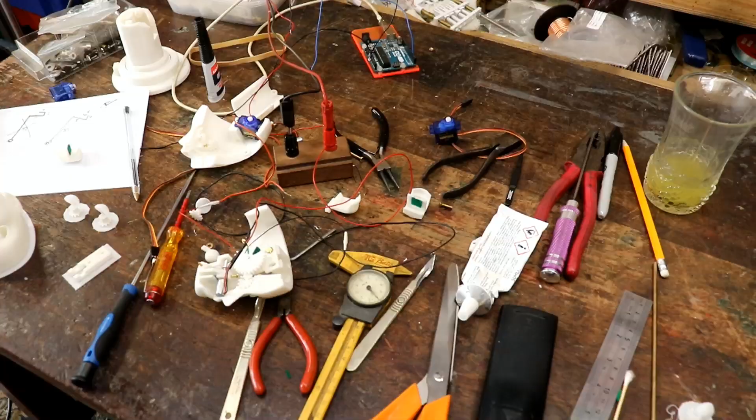Welcome back, dear friends, to a very exciting episode because the head, for the first time, the whole head shell has finally finished printing. Clear the decks, you say? Oh, I don't know about that.

Here she is. So 15.5 hours that took to finally print, but it did it, and that's very exciting because I've also managed to print eyelids.

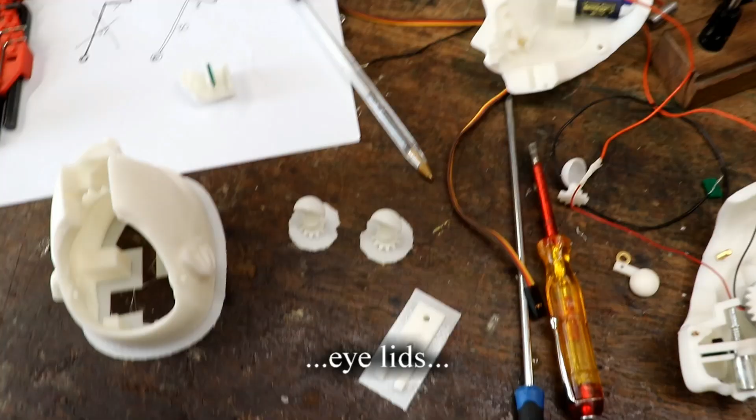I started off thinking, I know, I'll be clever, let's print two eyes at the same time. Perhaps I put them too close, but you can see as they're stringing across, they're so fine. I had a little bit of spaghetti there, so that was out. So I've printed both of them individually, plus a new combined piece to hold the eyes in place.

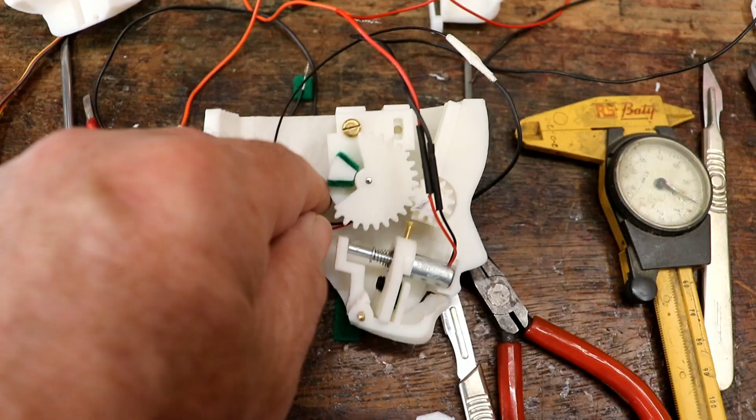I've got the mouth parts left over, the ones I developed, ready to go from that one, as is the eye motor. So it's time to put everything together.

Thing is though, I haven't been working for about 25 hours or something, because I just haven't stopped printing with it. It's stopped printing now - we can't have that. But what can we print now? Well, we've got all these bits printed.

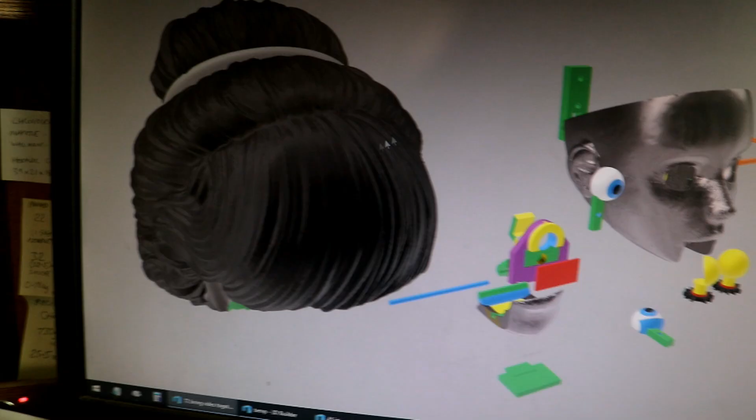But the hair - so what I've done is save that as an STL and then put it into the Creality slicing software, to discover to my horror...

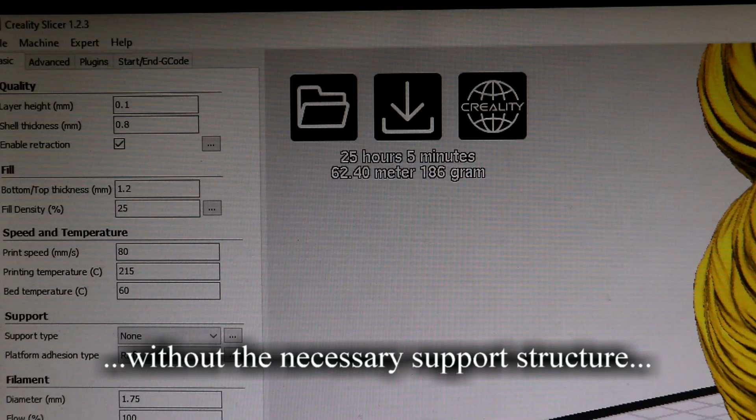Oh, hurdy, hurdy, hur. 25 hours, 5 minutes, 62 metres. That's nuts, that can't be right. I mean, it said it was going to take 12 hours for the head, and it took 15.5.

Thing is, if I start this printing, and then find I need to make changes while I'm putting the head together, I can't do anything about it. I think I'm going to have to wait. I haven't got around to buying another one yet.

But that's nuts, heavens to Betsy. 31 hours, or more like 38 hours at this rate. That's nuts. Oh well, I've put that out of my mind entirely.

Let's see if... I'm hoping this next part of the assembly is going to be most rewarding and enjoyable. Although, having said that, I do wonder, because the fiddliness of the eye...

Oh, I've just realised two things I haven't printed yet - eyeballs. Right, well that's good. I'll get that switched back on again and warmed up, and we'll get them printed.

Well, I've cleaned it all up, all little bits and pieces with some nice new sharp scalpel blades, and inevitably cut my finger. Never mind. This is going well - what I've discovered is I'm relearning stuff.

Let me zoom in a little bit. Because the eyes - I suppose I could change the shape of the back of the eyeball, because they're sort of sockets and come round quite a lot.

You can't glue these together and fit them in together. You have to sort of pop them in, but once they are popped in, because the gear teeth will line up, I'm wondering whether that's just as good to do it like that. Because there's one gear that's going to be turning both of them. Who knew? So that's exciting.

Heavens to Betsy. This is why these videos are taking more and more time to produce, because I'm having to work at the minutiae, I think.

That's right, adding the eyelid to the eyeball. And then I was working on the fact that I didn't want a big gap round here, because if the eyelid was a millimetre larger diameter and this was a millimetre smaller, you would get a gap, which the whole point was to avoid.

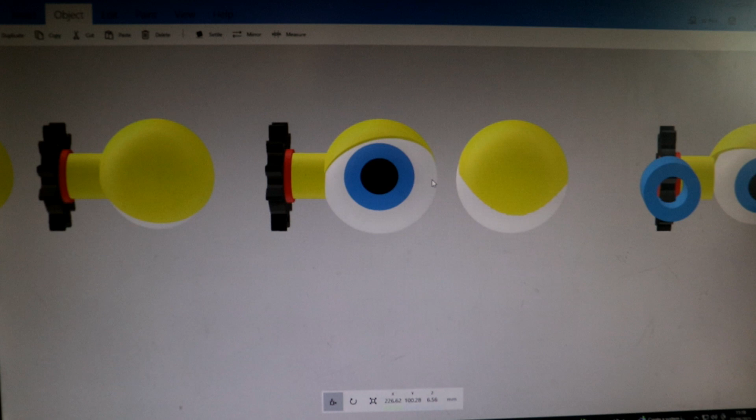So I worked out how I could squash the actual eyeball a bit, keep it the same width and same depth, but squash it down a bit. That way, dear friends, rather cunning plan even though I say so myself, you get an eyelid like that, but the back of it is still completely the larger diameter.

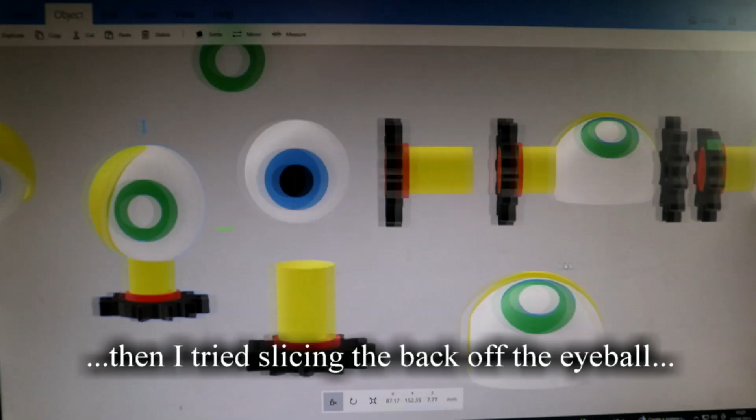Let's try it at 0.06. Same problem exactly. Because I sliced the back of it off, and it printed beautifully at 0.1, sort of standard or whatever. So that's nice, but obviously it couldn't print that at the same time.

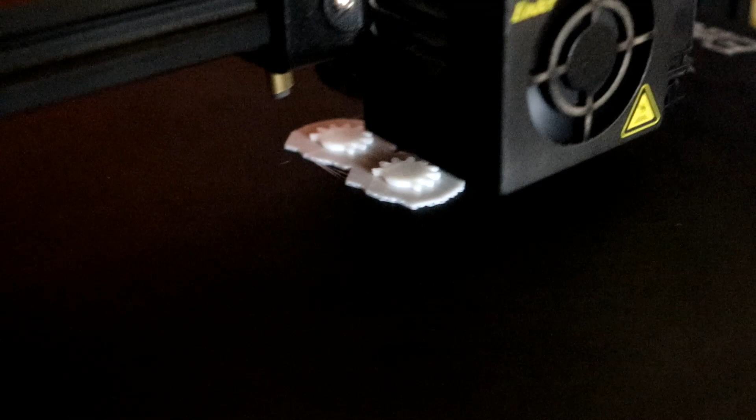So what I had to do was to separate the two, like this. And I made a key shape on it, so that's got a little block on the side, so it slots in. And here indeed I am printing two more eyes and two more gears, just to check that everything will actually fit together.

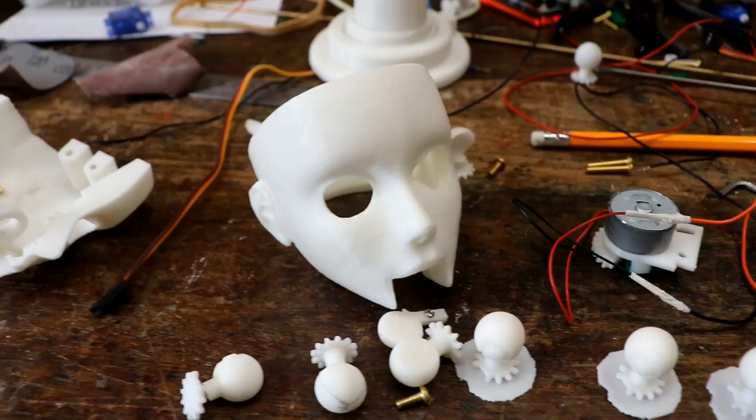Talking of everything not fitting together, while I'm waiting for those eyes to print, I could assemble the mouth, because I printed a new one of these. Well, the other one got stuck, I couldn't actually get it out of that half head. So I printed one and just discovered it doesn't fit. It's too wide, this head is too narrow.

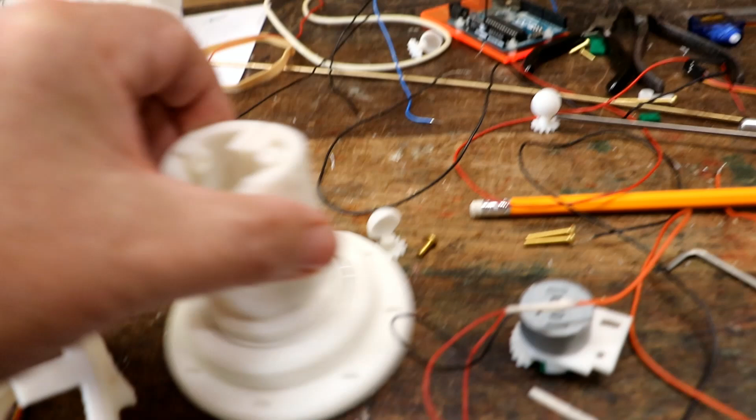And I thought, ooh, I haven't tried that on the neck yet. Try it on the neck and it doesn't fit, it's too narrow. So that's interesting. I know that I must have made a mistake when I was working with half a head. So I've got to do some design changes.

I think it only means I'm going to have to reduce the width of that slightly, and reduce the width of that. That is far more preferable than having to change all this, although I have to at some stage, because I don't need those eyeball supports anymore.

Thing is, of course, I couldn't print this attached to it, so I had to cut it, slice it apart, and then make a little socket in here. Originally it was just a round one, so you had no idea where you should glue the gear in, where it should line up with.

And I thought, no. So I created a key, funny little rectangular bit at the bottom. It slots in beautifully and allows you to line it up perfectly, and also allows you to use these for both eyes and just flip the actual eye bit over.

So that's exciting. And I've tried some other things afterwards, just to overcomplicate matters further, of course, but we're going to stick with that. The eye saga continues. It's unbelievable.

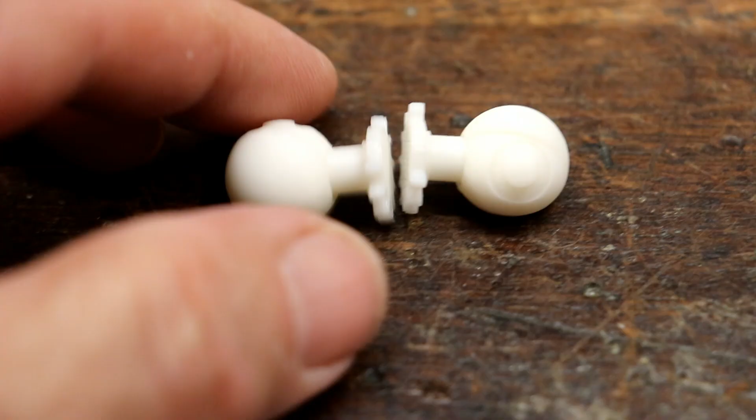I printed them as a final test and forgotten that I'd added, at some stage, made that rim a teensy bit wider by about 0.2 millimetres to try and take up any horizontal slop, and they wouldn't fit. So then I removed that and made it back to where it originally was when it did fit, and then printed another couple and forgot to flip one over. You could not make it up.

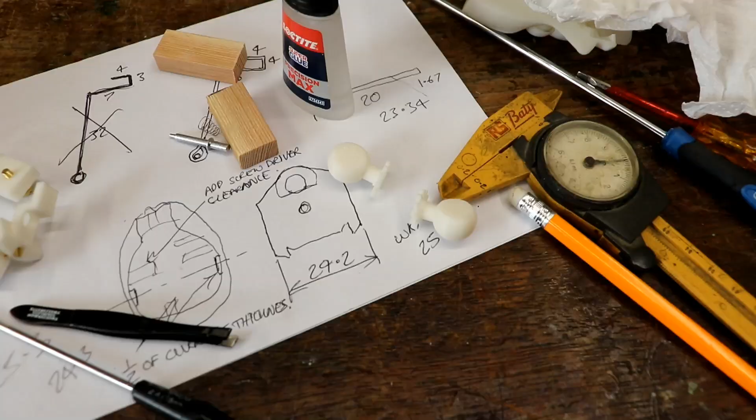Because having got those two eyes printed, I couldn't get them to line up on both sides. Then I noticed that in fact I'd flipped the eyeballs over, but I didn't think I had to with the gears - the teeth are ever so slightly out by a few degrees, so I had to flip that over too. So I'm printing another one.

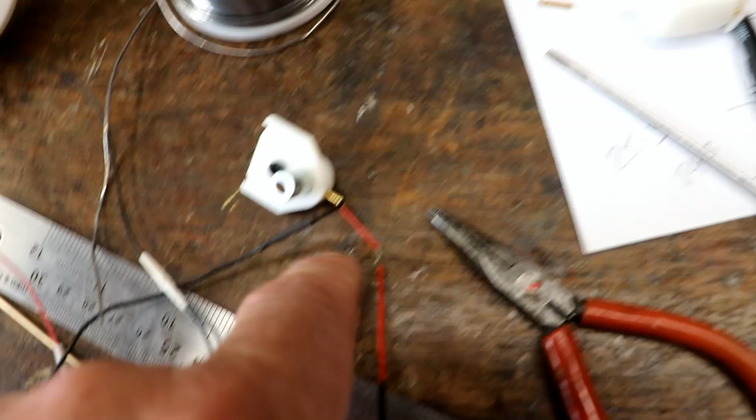And I started cutting those little bits, the pivots for the jaw, got the jaw in and all working, and then noticed the wire had snapped on the mouth solenoid. So I had to take that all apart, get it out again - thank goodness I could get it all out. Then I soldered it and put it all back together.

Oh, it's just never ending, it seems. I just want to get the eyes and the mouth to work.

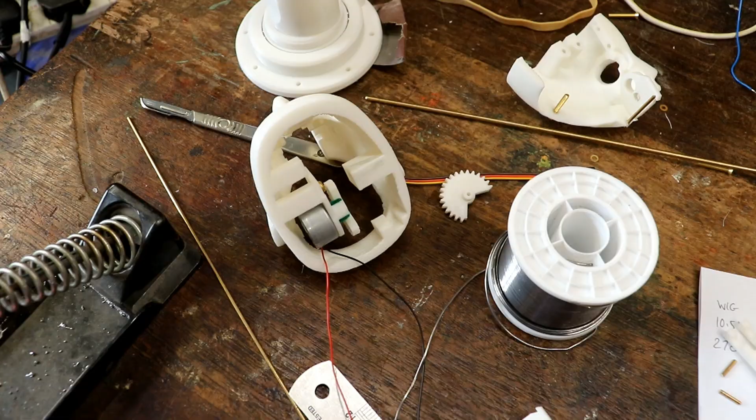Well, that was a little bit more positive, because I remembered to put the spring and the solenoid centre in first - well, almost - before I screwed that on. I also found out how to set this up and align those two little rods. A bit of masking tape over the bottom holds it all on and makes it so much easier.

So that's good. I just need to wait for this wretched eye to finish printing so I can try and realign those ones. Oh, the neck.

I remember thinking it can't be this simple getting a servo motor to move it like that, and it was. I should have known that didn't bode well for the future. Anyway, while I'm waiting for that, I'll go and do the dishwasher.

Eye open. Isn't that lovely? I'm so pleased about that.

I'm really looking forward to writing a little sketch to function to do that. And then the mouth.

And of course I can control the speed and everything with both of those, with the pulse width modulated output to control the power, sort of. That's amazing. And then being able to look right and left - oh, so excellent. It's amazing how lifelike she looks suddenly, with her eyes and everything.

Now I can try and sort out that wire bending bit that links the servo motor in the head with the back of the neck.

So here are the linkages from before, and here are my drawings. Let's see if we can get that set up and get the servo screwed in.

Oh dear friends, another step closer. I'm so pleased to have got that linkage worked out earlier.

That's really handy, and it just fitted in so I can get the dimensions off that, and that's allowing her to look right up and right down the limits of the head without having to stop the servo or anything.

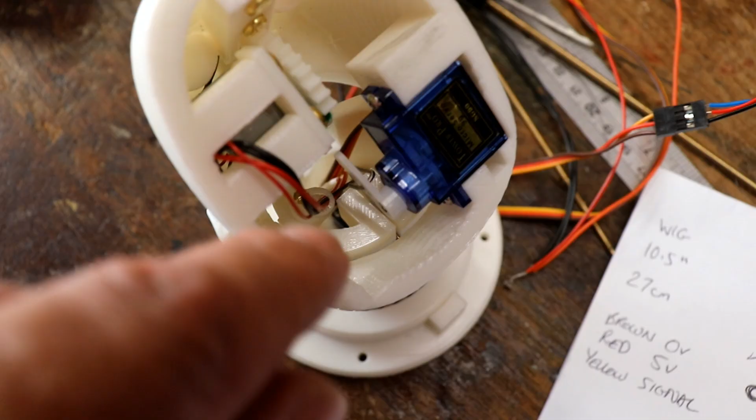I've got the wires fed up and around, because I don't want to get them in the way of any of the internal mechanisms, so I've worked out where I need to add a couple of little bits - little hook things.

Oh, that's great. Right then. So I think I'm going to try and dig around and look for a couple of H-bridges so that I can control the solenoid and the eyes from the output of an Arduino.

And then possibly even get it wired up to an Arduino. I can't wait. What on earth is this new noise in the workshop?

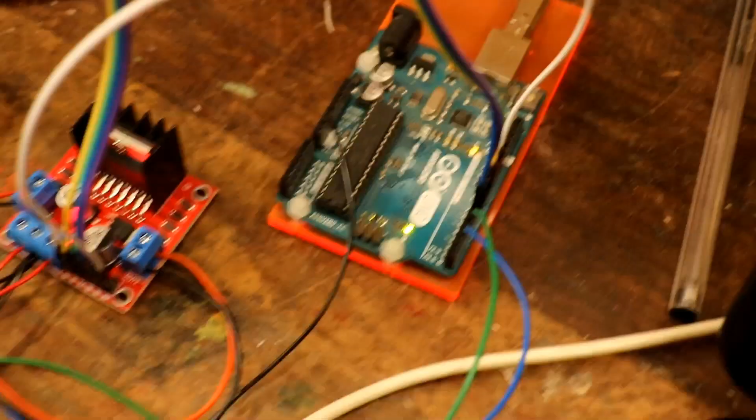Well, I really wanted to finish this video by showing you something working, showing her face moving. So I've been wiring things up, and indeed programming an Arduino sketch, and indeed connecting an Arduino. That is doing my head in at the moment.

So we've got an Arduino wired up. I've written a sketch just to basically test, and also I miss writing sketches. I've really had enough fiddling around with the 3D printer.

So I've written a sketch just to move her head around, open her eyes, so we can see what it looks like. Eventually, next video, I want to replace that with a Teensy and a Teensy audio board, because they're amazing and it'll allow her to speak and control her mouth properly.

So I've got outputs to the two servo motors, pulse width modulated output, so I can move her head up, down, left, right.

They're run off, because obviously they draw far more current than the Arduino can provide, an H-bridge controller. After several hours of mistakes and trying to work out what on earth I was doing, you run it from 12 volts, not 5 volts, and there's a voltage regulator on board which creates the 5 volts logic for the chip, but doesn't run the motors.

The 12 volts runs the motors, but you can take that down with pulse width modulation to sort of 5 volts, by putting in 105 out of 255, I calculated, for a duty cycle. You can also use the 5 volts this has produced, which is what I started with, to run the two servo motors.

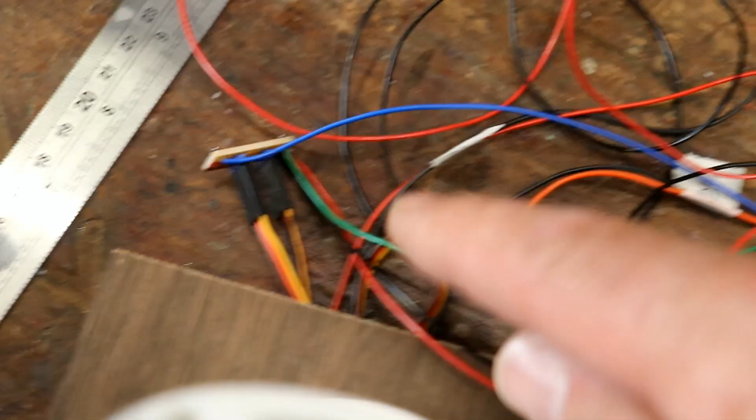Great stuff. The thing is, the noise - for the time being I've written a sketch which just has lots of random things. This is the loop. It's just opening and closing the mouth randomly using milliseconds for timers. I know I'm using them the wrong way, but I'll correct the maths. I can never remember once I've got it working.

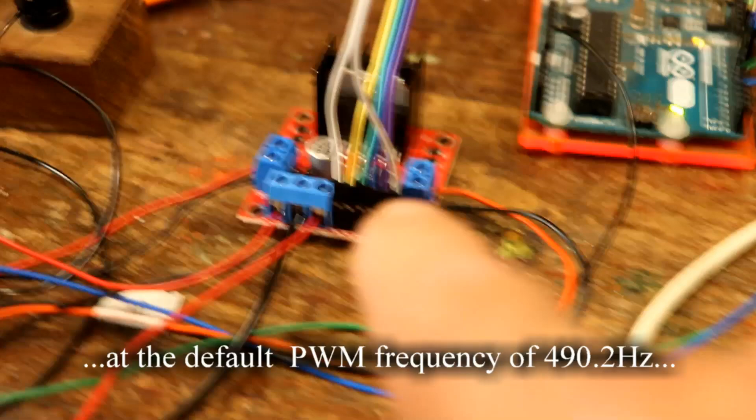As I say, this is temporary because I just want to see it working. So it waits, opens the mouth, waits, closes the mouth, and so on. Thing is, because I've now got this controlled with pulse width modulated output to get the right voltage, the windings on the solenoid are buzzing.

I will illustrate for you. If I plug this back in, this is the 12 volt supply. I'm running the Arduino off the 5 volts from the computer. So the sketch is working.

That is not good. Also, she's blinking, and that's fine because the motor, for some reason, the windings don't vibrate. So the trick is to change the frequency, to raise the frequency of the Arduino's pulse width modulated output with some special code.

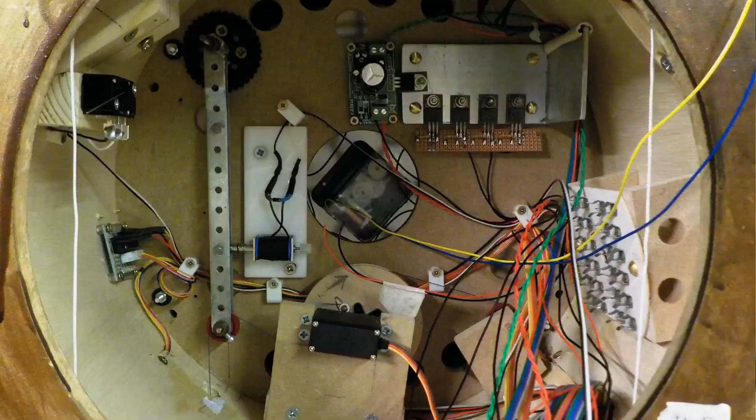I was so thrilled when I discovered how you could do that, because I had exactly the same problem with the barometric prognosticator 1, where I had a little solenoid swinging waves backwards and forwards from side to side, and every time it kicked in, every 5 seconds or so, you'd get this huge buzz. Right, I will go and look that up for you.

Well, for me actually. What a joy. I've just looked up and found the sketch for that, and there we have the line of code that changes it. You type that in setup, and it says set pulse width modulator timer 2, that's pins 10 and 9. Actually, this might not be right because I think this was for the Mega, but we'll give it a go.

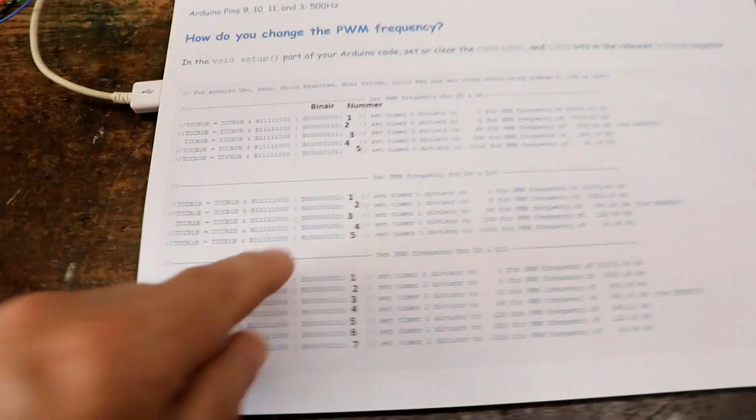She's now whistling, a whistling automaton, but everything's working, so I need to up the stakes again and try it on 31 kilohertz. Let's give that a go. Thank goodness for that, 31 kilohertz.

I did read that this particular timer affects the servo library which I'm using, so I'm now going to try the servos again to see whether they still work. Well, they were absolutely right - the servo library, when you add it to control the servo motors, just stops my changes, and the eyes and the mouth don't work at all. Nothing. Not a sausage. I just wanted to set it up so I could get a short video of all these PWM timers and all that.

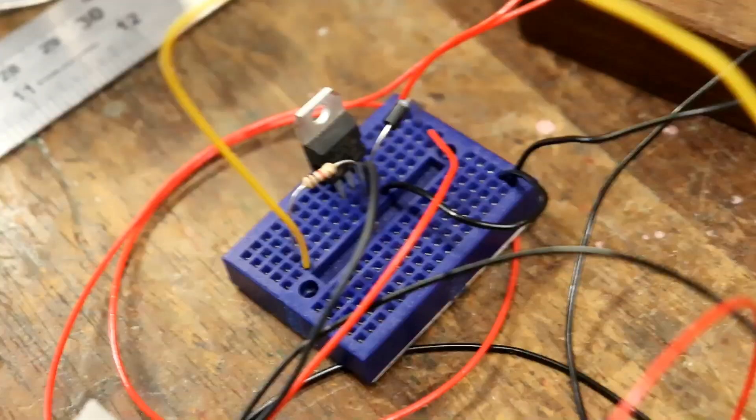Because what I realised was - can't help explaining things - when I was running this off 5 volts, which I am again, there was too much of a voltage drop across the switches to work the solenoid that needed about half an amp. So that's now running off 5 volts doing the eyes, and the Arduino is just controlling the Darlington pair to switch 5 volts straight to the solenoid with a cheeky little diode to stop any back EMF across it, which means it doesn't hum anymore, and it works at last.